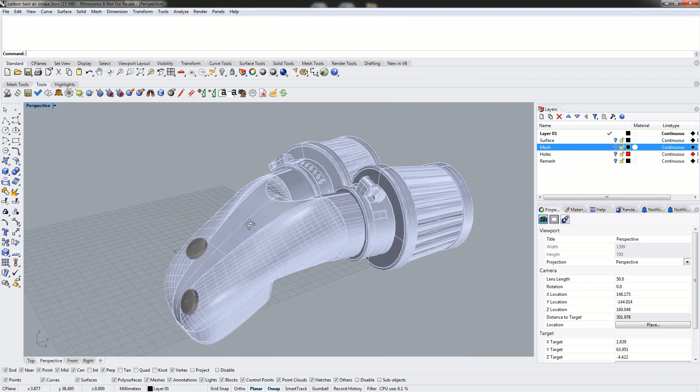Today we will be looking at a composite part. This is a twin turbo intake manifold, and as we can see, this was modeled as more than just a manifold. We also have some set screws here, ratchet straps, and air filters on here.

This particular part was not modeled inside of Rhino. It was imported as a step file and resaved as a Rhino 3DM. So because it wasn't modeled inside Rhino, we're going to have some cleanup that needs to be done before we can actually proceed with flattening.

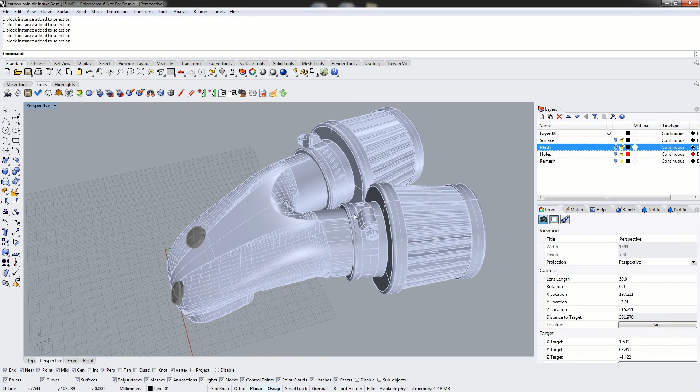So the first step is to remove the unneeded geometry. Because we're only flattening the manifold, this part here, we need to remove everything else. We can either select everything else, or we can select the manifold and invert the selection. In this case, we've selected the filters, the ratchet straps, and the set screws, and we can simply hide these or delete them.

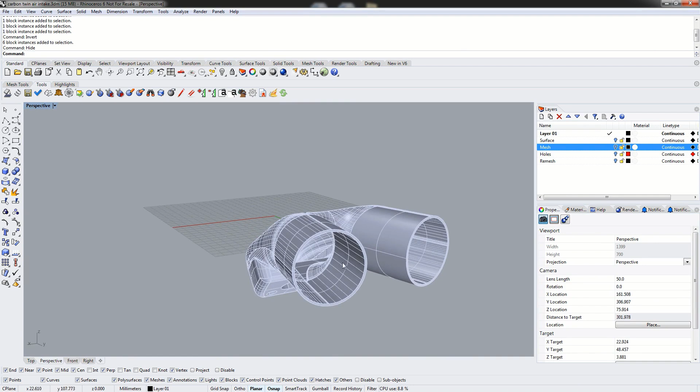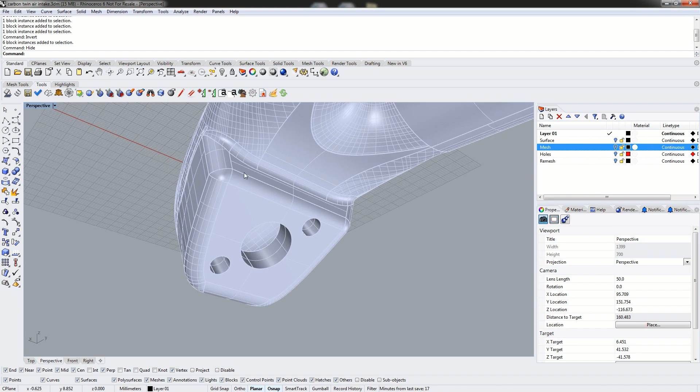When we look at the manifold itself, we can see that it has thickness to it. Where the filter is attached, we can see the thickness, and down here at the mounting plate, we can see we've got quite a thick plate. So we're also going to need to remove the thickness, and we're going to remove a good portion of the mounting plate for flattening purposes, just because we're not going to be doing this from the carbon fiber.

So our next step is to basically explode our surface here. This came in as a block, so we have to explode this to remove the block reference and to separate the poly surface out into individual surfaces. Once we're done all that, we end up with a single surface very much like this.

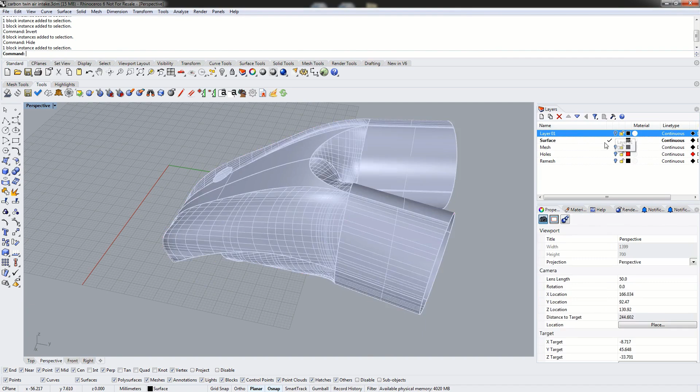So I've already done the work of separating this out. What we have here is a single surface. We've removed the filters, the ratchet straps, and the set screws here, and we've also removed a good portion of the mounting plate.

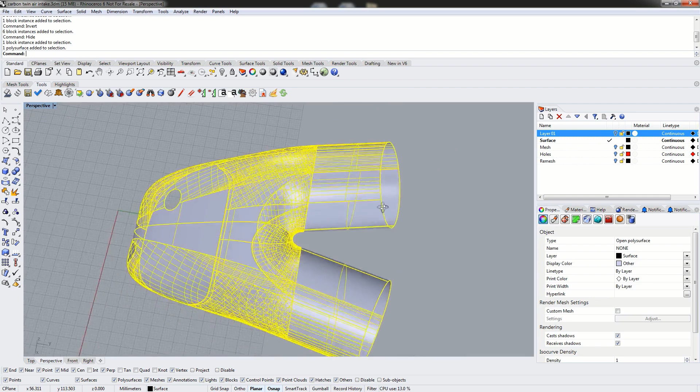With ExactFlat, the standard workflow is to first get your surfaces that you want to flatten. You need to create splits in the surface where you want your seams to be, and then join it all together into a single poly surface. When we mesh a poly surface, we get a much better result. We have continuous mesh vertices and shared edges across surface boundaries, which is ideal for ExactFlat.

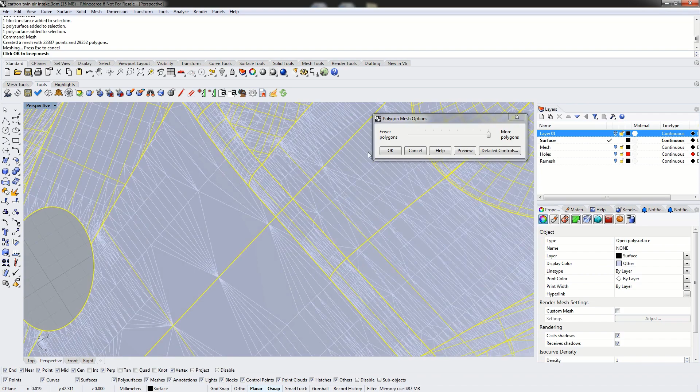So we join everything together as a single surface, and then we use the Rhino mesh command to create a mesh. We can use simple controls and drag the slider over to more polygons, and when we click preview, we get a decent mesh. But when we look at the mesh, we can see we have a lot of high aspect ratio triangles, and when we look at the quads, we have very strong rectangular quads that are far from being square.

Even though ExactFlat will work with this, when we use the Adaptive Remesher to recondition this mesh, because we have very large triangles right next to very small elements, we end up with an uneven sampling across the surface of the mesh, so we can get unpredictable results. In most cases the Adaptive Remesher won't have a problem, but on occasion we can get meshes that just don't adaptively remesh nicely, or have errors in them.

So the easiest way to prevent this is to instead use detailed controls. The most important thing is to change the maximum aspect ratio to about 2. What the maximum aspect ratio does is control the aspect ratio of the triangle. So when you consider the shortest edge of the triangle against the longest edge, the aspect ratio is how much longer the longest edge is.

So when we set this to 2, we're basically saying that the longest edge can be at most twice the length of the shortest edge. This is going to help control our triangle shape and size, as well as quads.

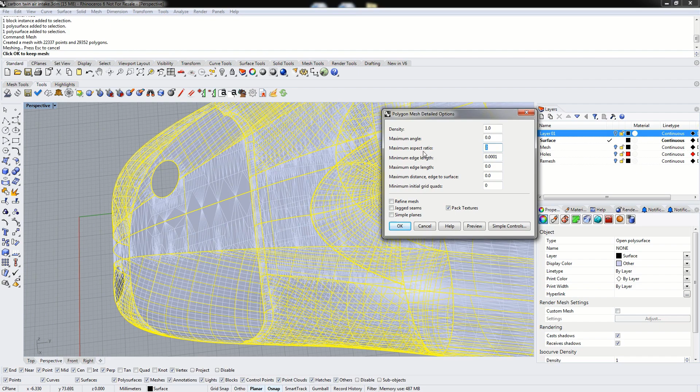The other thing we're going to change is the maximum and minimum edge length, and these are best set based on the size of the mesh. If we rotate our view so the construction plane is perfectly normal to our camera, we can use the coordinates and move our mouse around to get a sense of scale. When our mouse is over here, we're around -50 on the x-axis, and over here around 50, so this part is about 100 millimeters wide. Moving up here we're at about 120 on the y-axis, and down here about 10, so we're about 110 tall.

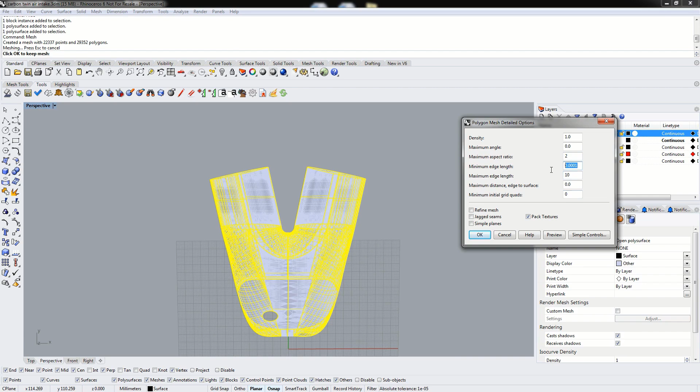Given that, we want to make sure we have a fairly good sample spacing. Based off these measurements, it's best to always start high, so we'll start with a maximum edge length of around 10 and set our minimum edge length to 1. If we hit preview now, we get a new mesh with a much more uniform distribution. However, our elements are still fairly large, so I prefer a bit smaller element spacing.

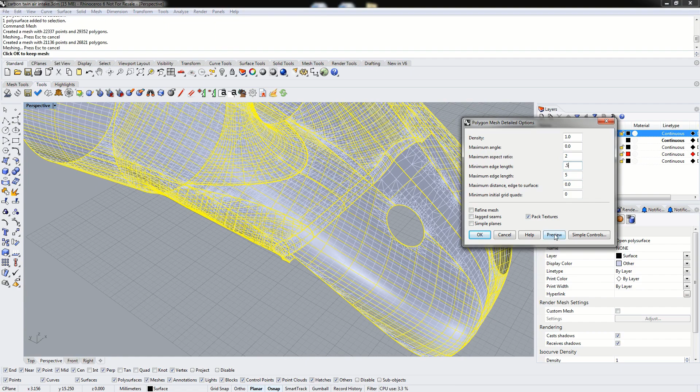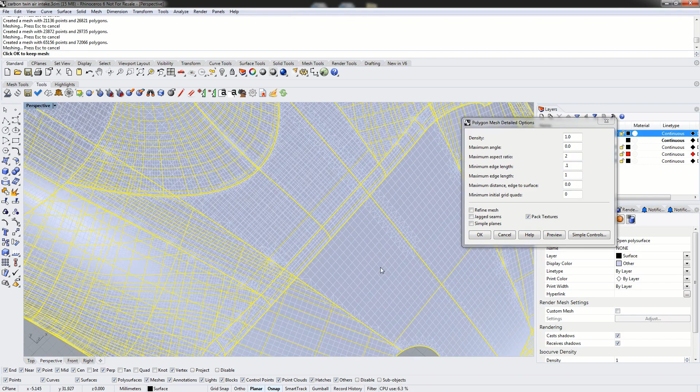So we're going to cut this in half: 5 for maximum edge length and 0.5 for minimum edge length. Now when we hit preview, we've got smaller elements, but they're still a little too large—we didn't decrease the size that much, so we're going to reduce further. We'll do 1 and 0.1, and now when we hit preview, we have a much finer element distribution. Our quads are now more or less square, and they tend to match the size of the triangles. This is a really good mesh to start with for the Adaptive Remesher.

So we're going to go ahead and accept this.

Because this part was created from an import file, it was imported as a STEP file from a CAD package outside of Rhino, so we do have a few meshing errors.

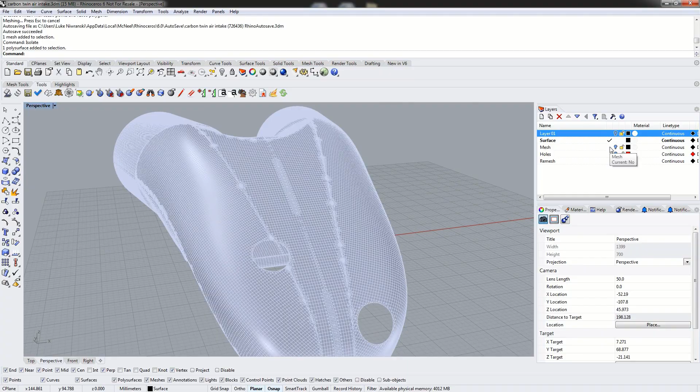Instead of showing the process of repairing these in the video, because it can take quite a while to identify and fix them all, I've already gone ahead and created a mesh and repaired all the errors, so we're going to be working with this mesh.

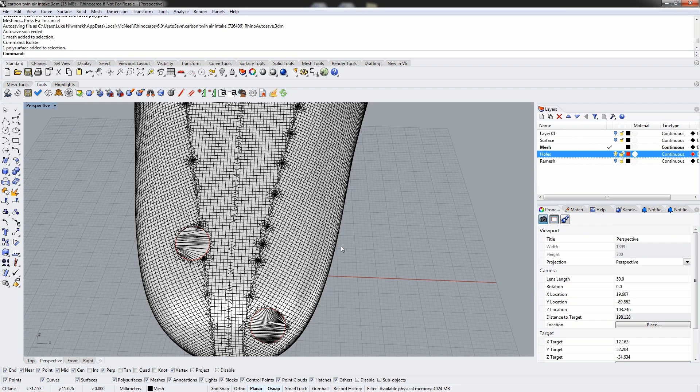I have also filled in the holes here where the set screws were, and I've preserved their boundaries as curves. With ExactFlat, even though we can flatten pieces with holes in them, it's usually better to fill those holes in and preserve the boundaries of the curve, so we can trace those holes back onto the flat pattern afterwards. By filling in the holes, we simplify the geometry that's going to be flattened, making it easier for ExactFlat to flatten this. We decrease the amount of time required to optimize, and we also allow the optimizer to give us a better pattern that will sew together at all the seams.

From here, we're going to go ahead and select our meshes. Instead of remeshing these outright, if we have an issue with the Adaptive Remesher, it's always good to have a copy of these, so that we can go back to them and make any repairs and remesh again.

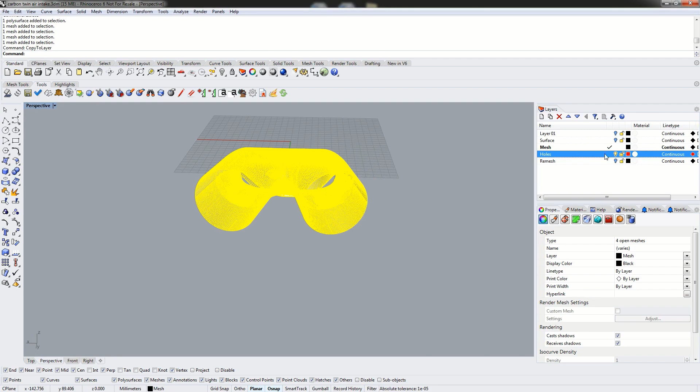So we're going to select our meshes and use the Copy to Layer command, copying these to the remesh layer to create a copy, and we're going to remesh the copy. Now we're going to rectangle select everything and switch over to the Mesh Tools toolbar, the ExactFlat toolbar, and use the Adaptive Remesher.

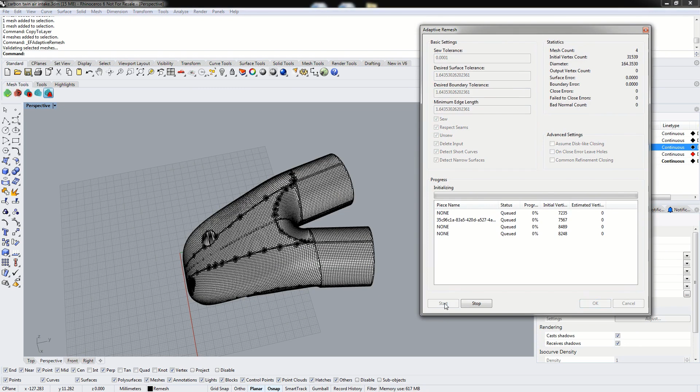So the first thing we're going to do before we start changing settings here is click the Start button. This is going to create a remeshed version of the mesh, and it's going to tell us how many vertices we have. It also gives us a way to visualize the part, and gives us a basis for determining whether we need to reduce or increase the tolerances.

If we have too many triangles here still, we're going to want to increase the tolerances, increasing the maximum allowed distance between the original and new surface and boundary. Or if we need additional triangles to preserve features that have been removed, then we're going to want to lower our tolerances.

To reduce the allowed distance between the new and the old mesh, in this case we're down to about 480 vertices on our largest mesh. So we do have some room to improve the fidelity and add more triangles while still creating a mesh that's going to flatten very well with ExactFlat.

So we're going to go ahead and reduce these here, cutting them roughly in half. I'm going to say 0.7 for these here, 0.7 and 0.7, and it's best to always keep your minimum edge length the same as the smallest value between the surface and boundary tolerance.

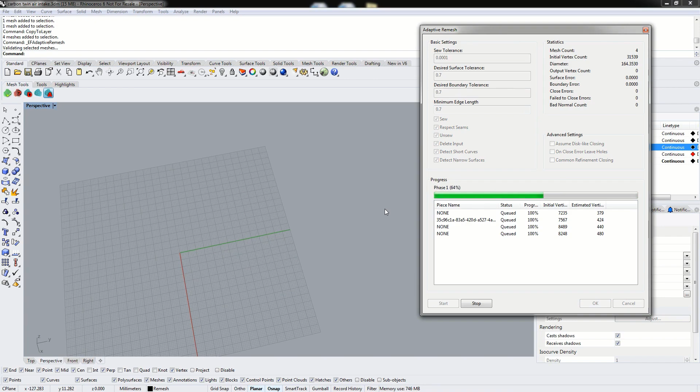So we'll just go ahead and click Start again. We're going to restart the remesher and create new meshes here. So it's analyzing the mesh again, and now it's giving us our estimates and creating the mesh.

So we can see that we've got more triangles here. It's preserving the curvature a lot better, especially down here where the two intakes meet up. So this is a good result. We're going to go ahead and click OK.

And if we rotate around, we can examine the quality of the mesh here. One thing we'll notice is that we've got a lot of areas where we tend to have zoning of the triangles—they tend to get very small. These can be fixed, or you can leave them as is.

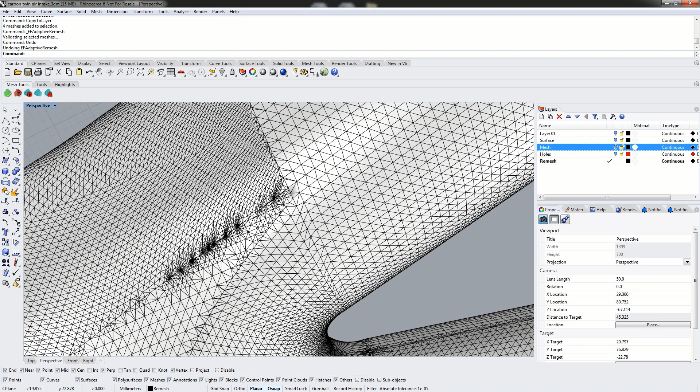We haven't created a huge number of triangles here, but if we undo the remesher, we can see that these areas all correspond to locations where the Rhino mesher has created a very large number of triangles. So this is the predominant source of errors, and this is what I spent most of my time fixing on this mesh before flattening it.

So the easiest way to fix these errors—this particular area here—if we redo our results, we can see that we've got one spot here in particular that's being highlighted. So we've got some kind of meshing anomaly here, and we can see that corresponds directly with this spot right here. Probably we have a very, very thin, small triangle right here that could be removed.

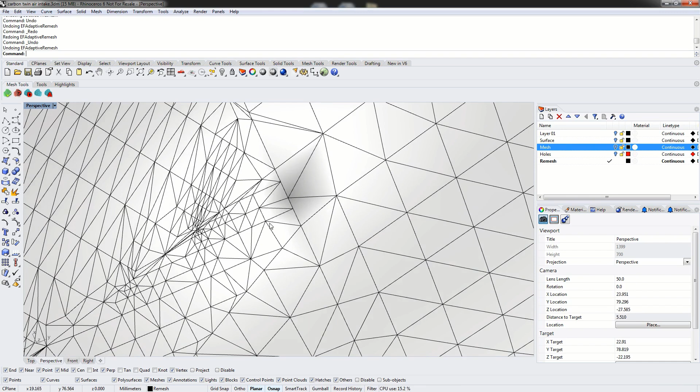So what we'll do is a quick repair on this mesh right here. The easiest way to deal with these kinds of problems is to simply remove the triangles. So in the case of this mesh, I'm just going to align it so I can remove or simplify this entire strip right here.

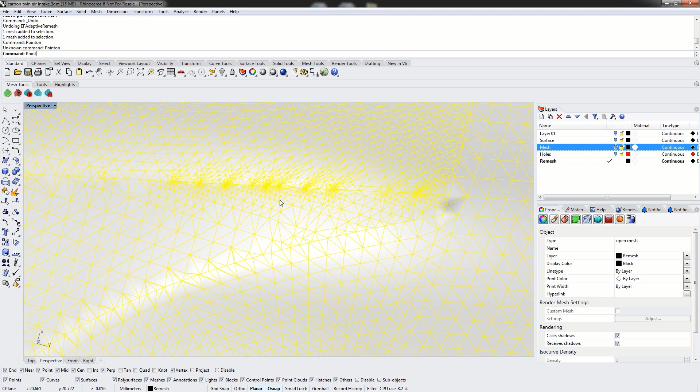So I'm going to try to make this perfectly horizontal as best as possible. Now what I'm going to do is use the Points On command. Points on. And this is going to allow us to start selecting vertices and manipulating vertices.

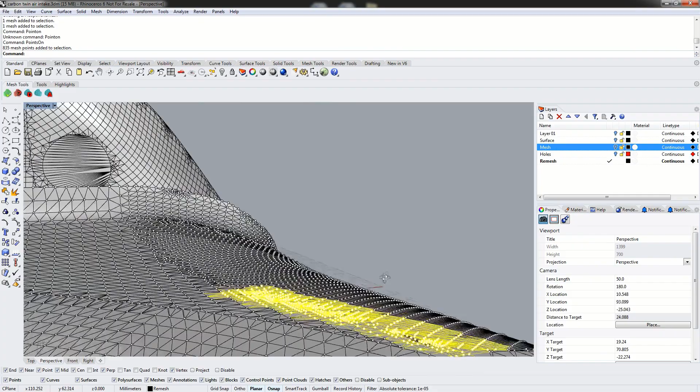But instead of manipulating them, I'm just going to select all these vertices right here, because we know we've got some kind of problem in there. And if we actually rotate around, this is a fairly planar surface here—we don't have a lot of curvature.

So the easiest way to deal with this is to simply delete the bad vertices. Now what I'm going to do is use the Rhino Fill Mesh Hole command, and fill this in. So it's going to greatly simplify. We've probably removed a couple hundred vertices there and replaced them with maybe 20 triangles. So this is a very great way to fix these kinds of errors.

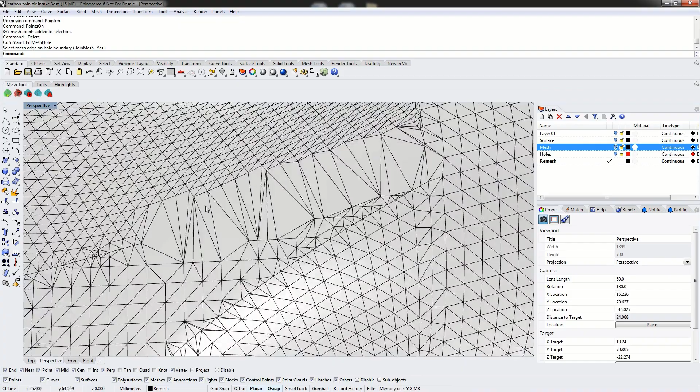Now what I'm going to do is, because we've filled the hole, we actually created a disjoint mesh here—it's created a separate mesh and joined it together. So we've got duplicate vertices all the way along the edges here. We're just going to use the Rhino Weld command to fix this. And now if we go to remesh these, I'll use the SelMesh command to select everything, and we'll adaptively remesh.

We'll go back to our original settings, 0.7, 0.7, 0.7. Now if we create our mesh here, we'll notice that our estimated vertex count is reduced for this piece, and we'll see that we no longer have that localized zoning there. So that's the easiest way to fix the mesh errors.

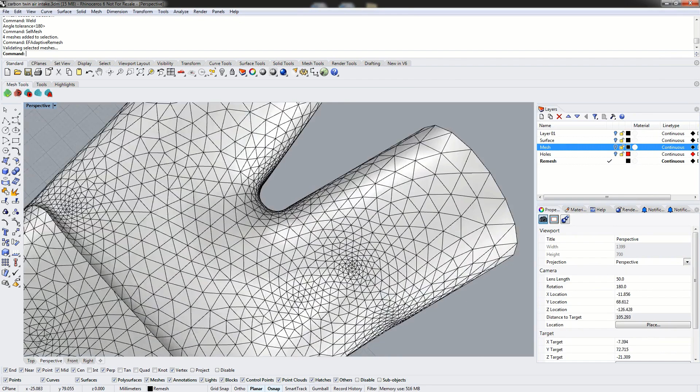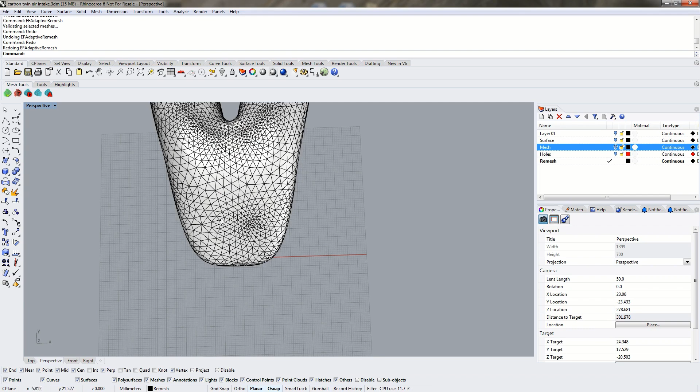We could do the same thing over here, and if we undo again, we'll see that that particular spot corresponds to these triangles here. So the easiest way to fix these errors - and in this case these aren't too bad. Some of the errors I did fix had very small or fine zoning, so we had to remove them. But in this case, if we undo again, we can see that area once again corresponds to an area of lots of triangles here.

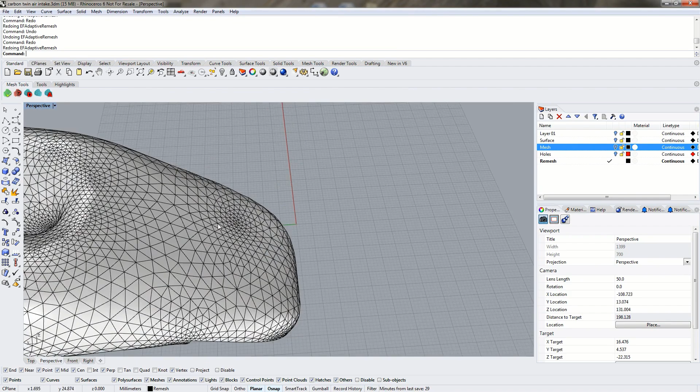So the result we got from the adaptive remesher redo isn't terrible. We have a bit of zoning here, but not excessive zoning, and we still have a reasonable number of vertices and triangles on this mesh. So it's not worth spending time to fully remove all these errors. But if you did need to, the easiest way is to simply delete the vertices associated with those triangles and just fill the hole in.

So once we've adaptively remeshed, the next step is to flatten using ExactFlat. We're going to switch over to the Tools tab of the ExactFlat toolbar, and use the very first icon here - this is the Flatten command.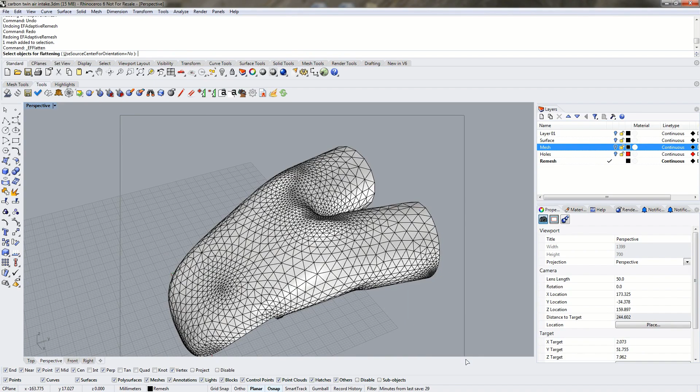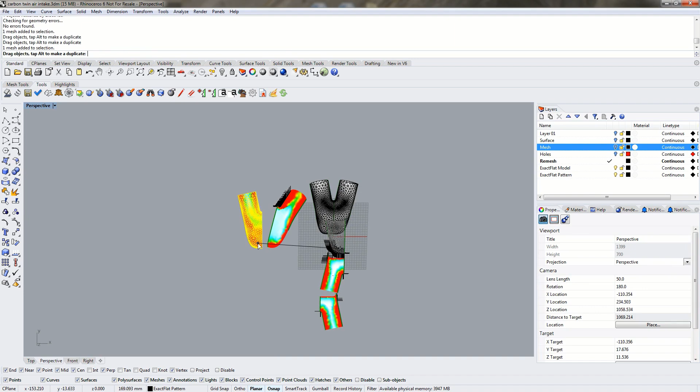ExactFlat is a two-stage flattener. The first stage is a very quick pre-flattening. ExactFlat has two different sets of flattening tools - the first are what we call pre-flatteners, and we're seeing the results of a pre-flattener right now. The pre-flatteners very quickly create an unoptimized flat pattern that may have folds, wrinkles, or flipped triangles in it. The whole purpose of the pre-flatteners is to be very fast.

Once we're done with our pre-flatteners, we'll move on to our optimizer - this is the second flattener we have, and it's a much slower flattener, but it's the one that's always going to give you the final optimized shape and reduce your average energy density to as close to zero as possible. One condition of using the optimizer, though, is that we cannot have any flipped triangles.

So when we look at our pattern pieces here, we can see a lot of black crosses, and these indicate flipped triangles, folds, or wrinkles in the pattern. These need to be removed before we can use the second stage flattener, the optimizer.

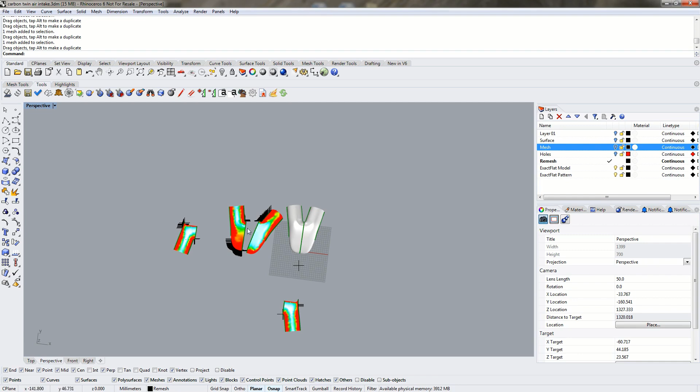Also, the performance of the optimizer depends entirely upon how much strain it has to remove. So when we look at the color of these pieces here, the color represents the relative amount of strain on the pattern piece. The default legend for ExactFlat has white indicating 0 strain, cyan about 5% strain, green 10%, yellow 15%, and red 20% or more.

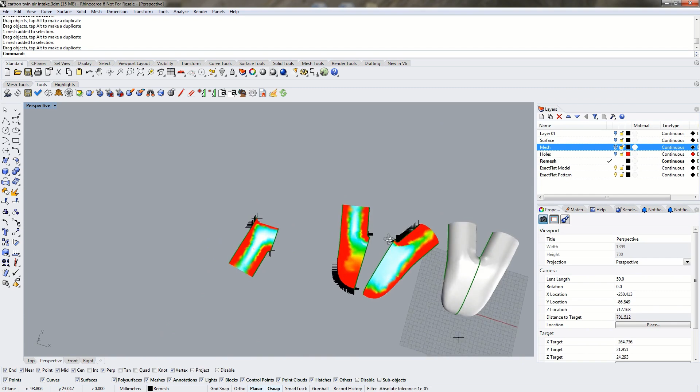So we have quite a bit of strain on these pattern pieces. The best way to think of strain is if we think of our original 3D model as a rigid form, a plastic shell - if we were to stretch these pattern pieces back onto the shell, the more strain we have, the more we're going to have to pull and stretch them to get them to fit back on. So when we have a lot of strain, it just means our pattern is too small - it's not going to fit onto the piece.

So when we think of this in terms of our pre-flatteners, the two biggest goals for our pre-flatteners are, first and foremost, to remove flipped triangles - all these black crosses here - and second, to reduce the strain on the pattern pieces.

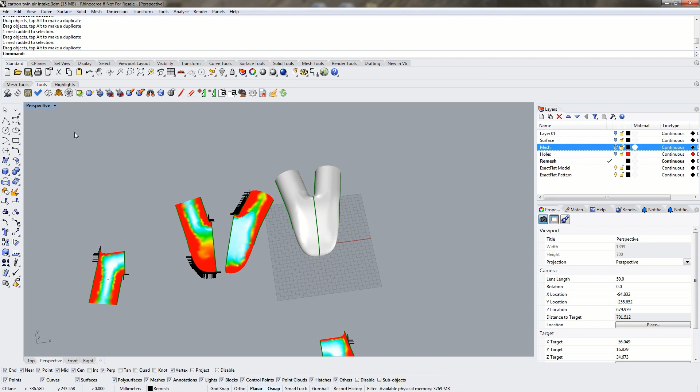So if I were to use our pelt tool here on this piece, first of all, we're going to notice that we no longer have the crosses or the flip triangles. Second, we've reduced some of the strain, although we still do have quite a bit of strain on this piece. So we could try a different pre-flattener here.

So we'll try our CCM initial and see if we get a better pattern here. And in this case, we actually start to see a bit of black here. Black indicates sag, which is the complete opposite of strain. This means we have excess, or more material than we need.

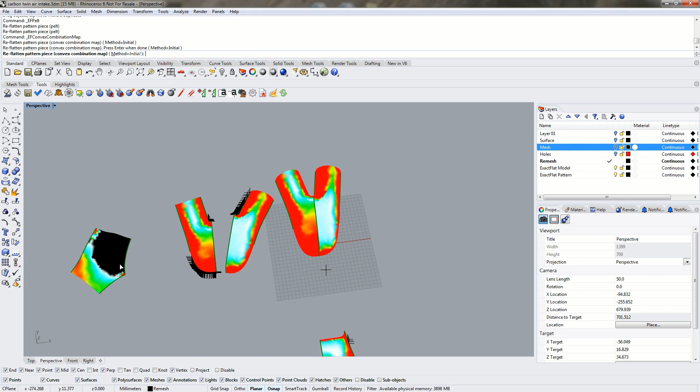So in this case, none of our pre-flatteners, fracture is not going to give us much of a better result. We do have a lot less strain with fracture, however, we do have flip triangles.

So one thing we can try is to remove the flip triangles with our CCM minimal pre-flattener, or we can use our automated flip triangle removal. But for this part, pelt tends to give the best results.

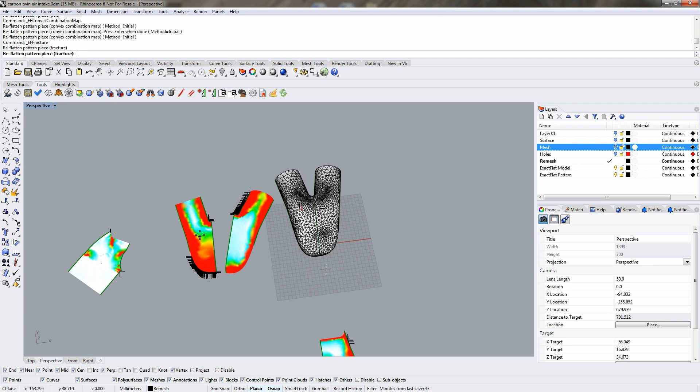So we'll try fracture on a few more pieces. And the other thing with fracture, too, is we can use our pre-flatteners as many times as we want, on as many pieces as we want, so long as we optimize our pattern pieces after we pre-flatten them.

So the typical ExactFlat workflow is, once you've flattened, you can use any of the tools at any point in time that you want, whether it's a pre-flattener or some of our cutting tools or vertex manipulator.

So long as optimize, our second stage flattener, is always the very last thing you do. Because the optimizer is going to optimize your pattern piece for best fit, it should always be last.

So we're going to go ahead and pelt these pieces here because we know pelt gives a good pattern, and we'll do the same to this one over here and this one here. So for all these pieces, we've removed all of the flip triangles, or folds and wrinkles.

We don't see those hatches anymore, and we've produced a pattern piece that doesn't have huge amounts of strain, although we could produce patterns that have less strain.

In this case, because we've got a lower vertex count, we're all under 1,000 vertices. Even if we do have elevated strain values, ExactFlat's still going to be able to handle this just fine.

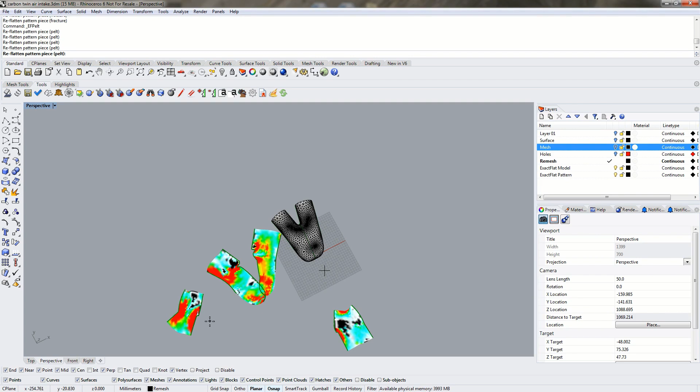So sometimes it could be difficult to spot flip triangles, especially if we have a lot of sag on the pattern pieces. So one easy way to do this is to switch over to the Highlights tab of the ExactFlat toolbar, and we're going to turn off our strain analysis.

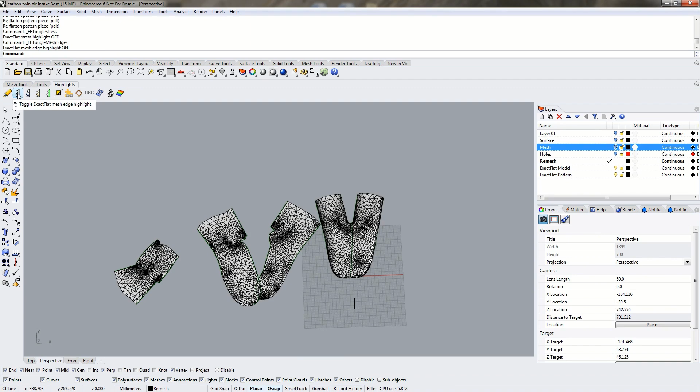Oftentimes, too, you'll have the edge highlight turned on, so this is what it looks like with the edge highlight turned on—you can actually see the edges. If this is the case, you can turn the edge highlight off as well.

This makes it very easy to spot folds, wrinkles, or flip triangles on the pattern piece. In this case, we don't have any folds or wrinkles, so we don't have to do any additional work.

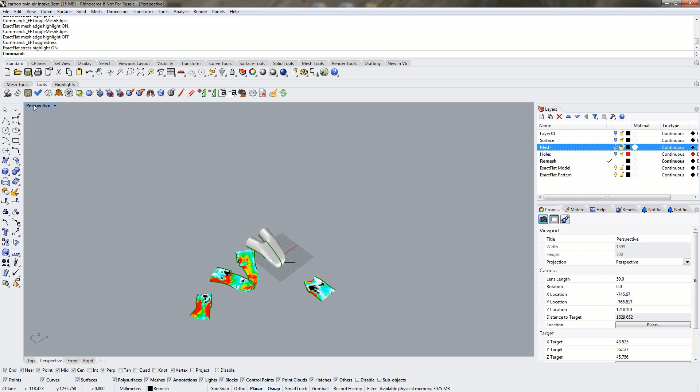So we'll turn the strain highlight back on, and we're going to go back to our Tools tab. At this point, because we're dealing mostly with our pattern, what I'm going to do is minimize our perspective viewport by double clicking on the viewport title.

And now we're going to go over to our top viewport, so we're looking straight down at our pattern piece. I'm going to maximize this by double clicking on the top viewport title.

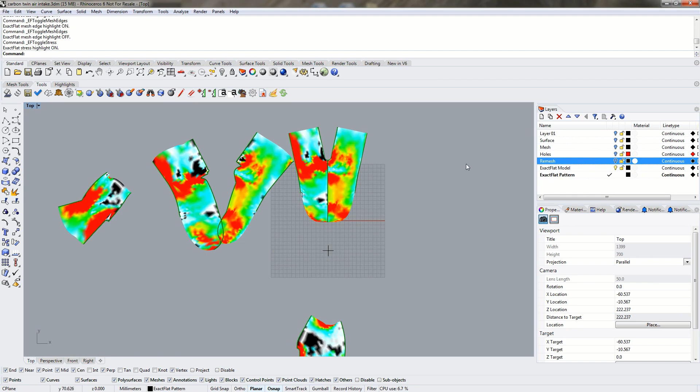I'm also going to go over to our layers tab, and I'm going to make the pattern layer our default layer, and I'm going to hide the remesher model and the 3D reference model as well. So now we're only looking at our pattern pieces here.

So we've accomplished our two goals using our preflatteners. We've reduced the strain a little bit, and most importantly, we've removed all the flip triangles. So now we're going to use the optimizer to minimize the average energy density.

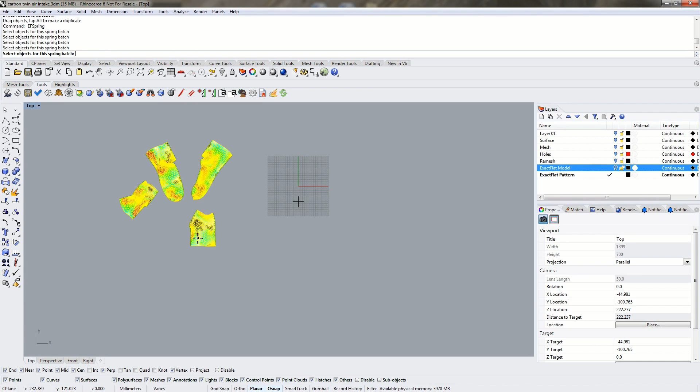We'll start the tool, select all our meshes, and press enter to accept the selection. For this part, I don't have any carbon fiber, fiberglass, or composite materials in our default database, so we're just going to use a simple cotton. But when you use ExactFlat, if you've had your material analyzed or want to choose a different material, you can click the Browse button to open the material browser and choose from one of ExactFlat's default 85 materials or one you've created yourself in the library. When you're done, just click OK.

We can start the optimizer by clicking OK here, and this opens up the spring status. As this is running, we'll notice both the colors and the shape of the pattern piece changing. What's happening is ExactFlat is expanding the piece, either adding or removing material, and changing the shape to optimize the fit onto the original piece. So if we think of our 3D model as a rigid plastic shell, it's changing the shape so that when we lay this pattern piece back on the rigid shell, it fits such that we have to pull or stretch it as little as possible.

We can see the colors changing because the shape is changing, which means the amount of strain on the pattern piece is also changing. We can see this in the optimization report. Piece 1 is finished optimizing already, and we're on to piece 2. I'm going to go back to piece 1 here, and we can see different information being reported for our pattern piece. Probably the most important piece of information is our average energy density.

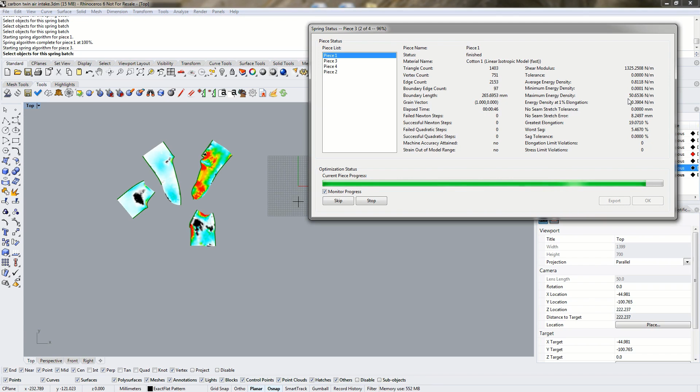Although this is important information, it's not as important because we can artificially increase the maximum energy density just by manipulating an interior vertex. Really, it's the perimeter that we're worried about when we optimize our piece. So the maximum energy density at 50 isn't a huge problem.

If, for instance, we had a maximum energy density that was, say, 20,000, that's a good indicator that we've got some kind of meshing error, and that's a problem that will have to be fixed. That may be the result of overlapping triangles or an impossible surface to produce, for instance some kind of loop built into our mesh. That's when we're going to start to see very high energy and maximum energy densities like that.

The other couple pieces of information that are important would be our no seam stretch error. The dialog does report the boundary length of the 3D model piece, and the no seam stretch error is basically the difference between the 2D pattern perimeter length and the 3D model perimeter length.

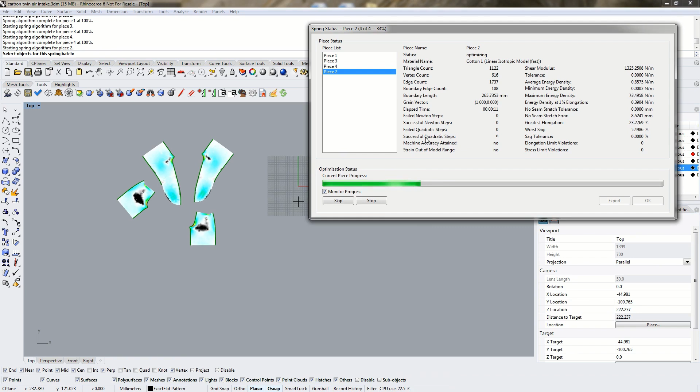Right now, after we've optimized this pattern piece, our pattern perimeter has changed by about 8 millimeters, which over the size of the piece is not a huge error. Depending on the material being used, especially like cotton, materials are stretchy, so that error can be taken up just by the stretch or expansion of the material. If you're working with materials that don't have any stretch, like a composite weave, which typically doesn't stretch at all in the warp or weft direction but can deform on the bias direction, it's best to have your no seam stretch error as close to 0 as possible.

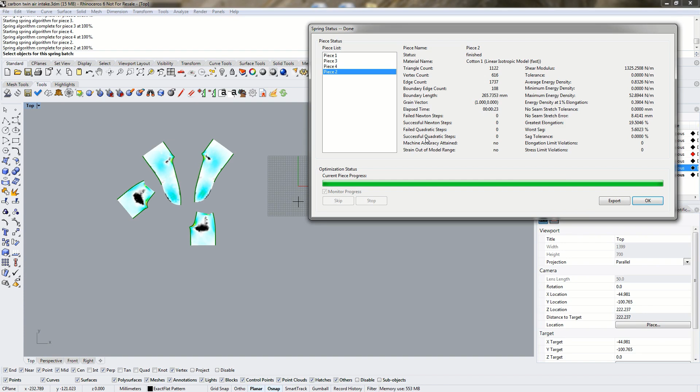And if you're not getting decent results just with the default settings, when we go back to the pre-spring settings, I'll start the optimizer again here on one piece. We can turn on a preserve boundaries option, which allows you to constrain the no seam stretch error to within an acceptable tolerance. So we can say that we want at most 5 millimeters of error between our model and pattern perimeter length, and the optimizer is going to constrain the perimeter length to at most 5 millimeters.

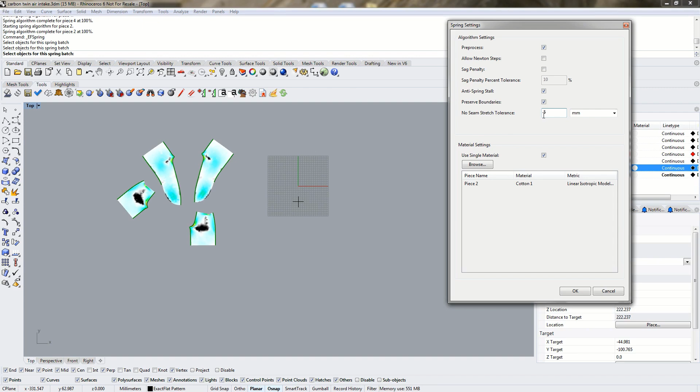So optimization has completed for all of our pieces, and we can see that the color and shape of them have all changed. We've greatly reduced the average energy density for these pattern pieces simply by optimizing them.

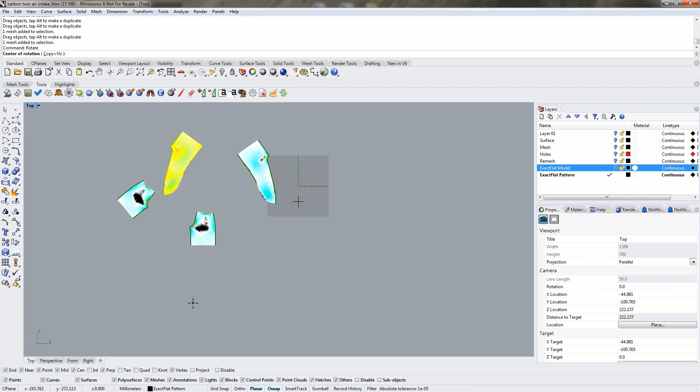At this point, we can rearrange our pattern pieces to help us with the patterning. One easy way to do this is we can simply rotate the pattern pieces using Rhino. In this case, I'll use the rotate command, and I'm just going to choose one of the vertices here as a selection point to rotate the pattern piece.

I can also use the ExactFlat find tool, which helps me find neighboring pattern pieces. With this tool, I'm going to rotate this again right here. I'll select these two points and make this perfectly horizontal. I can snap my selection points to be perfectly horizontal or vertical by holding the shift key on the keyboard.

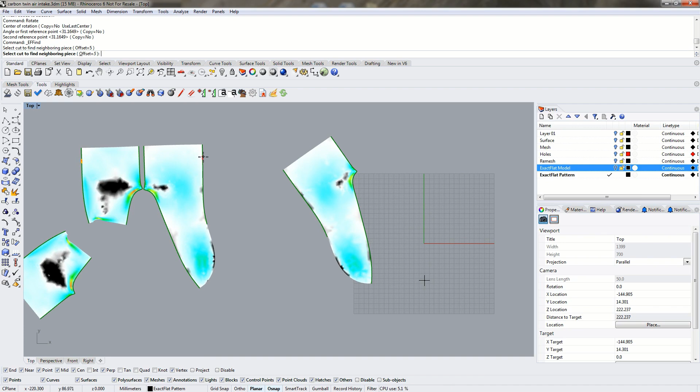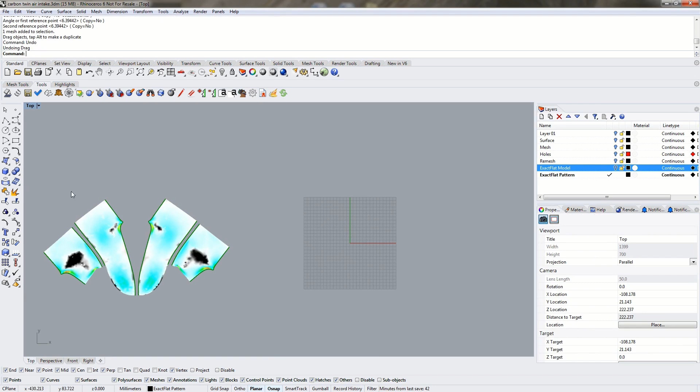Now I'm going to use the ExactFlat find tool to find the neighboring pattern piece. As I mouse over here, it's going to automatically find the neighboring piece for me. So I'll just rotate these here. This is how these pieces would come together, just like this.

At this point, depending on your patterning workflow, you may be using Optitex software, Gerber, or AccuMark for your patterning work, in which case you can simply create a DXF and start your patterning process in another package. However, ExactFlat does provide basic patterning tools.

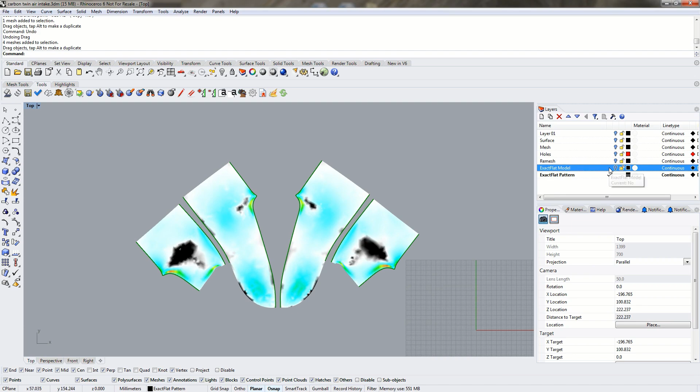Before I forget, we did remove the holes. We did have holes for the set screws. If we go back to our model layer here, we no longer have holes in our 3D model. I'll go back to our perspective view, but we did save the location of these holes, and they're on the holes layer. We can see we've got these two holes here, and they are curves that do lie on the surface of the mesh here.

So what we're going to do is trace these holes onto the pattern pieces, and to do this, we're going to use the ExactFlat trace command. We're going to start the command by clicking on the icon, and we're just going to start by selecting the first curve. It's important to note that the command line always tells you what is expected, so it's best to read it when using ExactFlat commands. It will tell you what needs to be selected to perform the action. So we've selected our object that we're going to trace.

In this case, it's a curve. We're going to trace it onto this model piece, and at this point we're given the option of defining our curve fit tolerance. When I created this curve, I simply duplicated the mesh border, so we created a polyline, so the curve fit tolerance has no role here. However, if we were tracing a spline or curve onto the mesh, then the curve fit tolerance defines how many points we want when we tessellate that curve into a polyline.

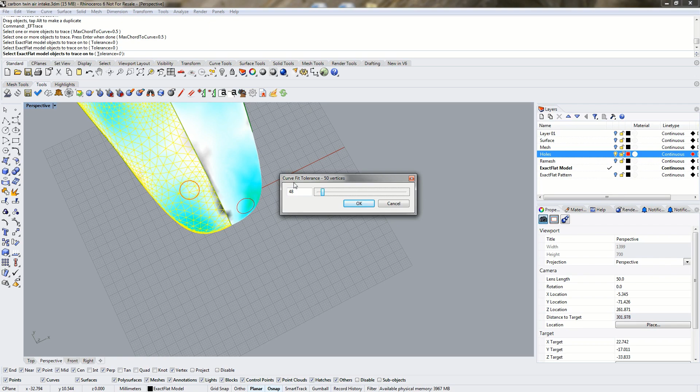So we'll go ahead and click OK, and very quickly we've traced this curve onto the 2D pattern. If we make our pattern visible, we can see this is the perfect location traced from 3D to 2D of that hole.

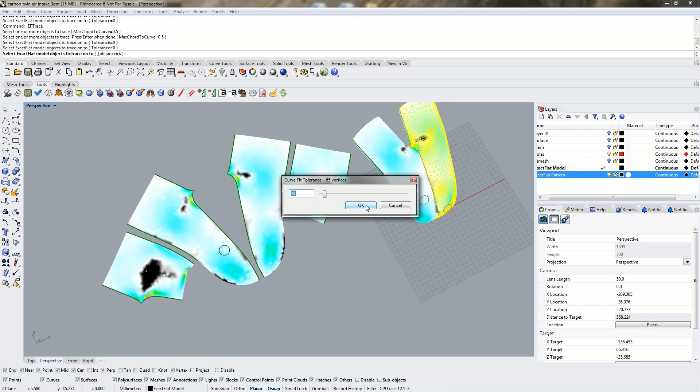So we'll repeat the process again using this curve over here. We're going to trace that curve onto this pattern piece, and we're just going to accept the curve fit tolerance, and very quickly we trace that hole onto the pattern piece.

We can use the ExactFlat patterning tools to add things like notches, and in this case we've used our patterning tools to trace the location of our holes back onto the pattern. This tool can be used to indicate the location of different hardware items, in this case the set screws, and the location of the hole that needs to be cut out. We can use it to indicate the location of labels or mark where things need to be sewn. We can use it for annotation purposes if you need to indicate a seam line of some sort, or the start or stop of a zipper, for instance. You can use the tool to create a marking on the pattern to indicate those locations.

We can also use our notching tools to add notch or alignment markings to the pattern piece. We just start the tool by clicking this icon here, and the default settings can be changed. This is the default template used for all of our notches that we're going to be adding. For this one here, we're going to set the notch text that's going to be created as simply a unique auto-incrementing number, and we're going to create red slit notches.

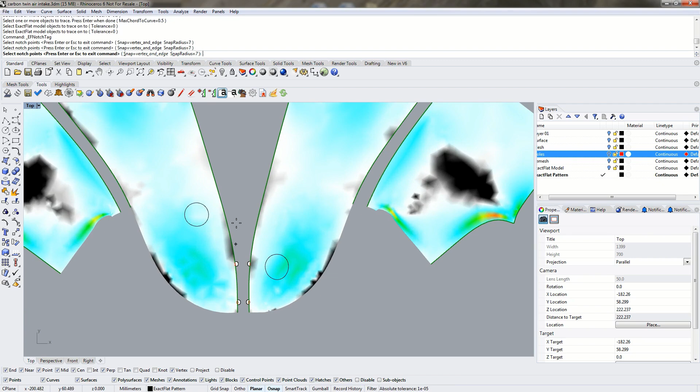We're going to go ahead and click add, and as we start adding our notches here, we're going to notice the notches appearing on both the left and right hand side of the cut. This is because ExactFlat builds associations as it's flattening, so it knows which two pieces sew together. So as we add notches to one side, ExactFlat is going to automatically add that notch to the other side. When we're done adding all our notches, we just press enter on the keyboard, and we can see all the notches that we've created in the list here.

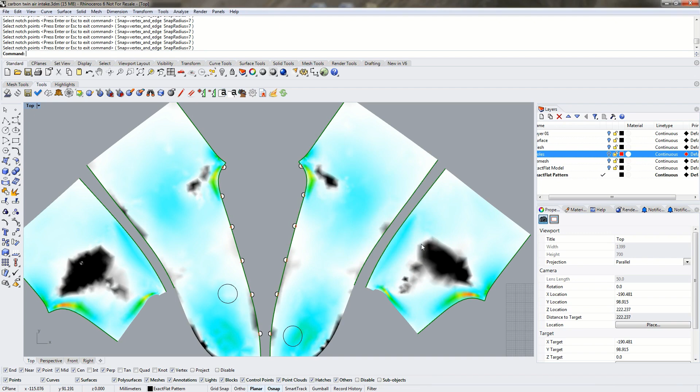Once you're done adding your notches and adding all your markup to the pattern, we can create a DXF by using the ExactFlat DXF export tool. This tool is different from simply saving your part as a DXF. When you export a part with ExactFlat using the DXF export tool, all the hardware markings that you've traced on, all the notches that you've created, any kind of tags that have been created - all this information is transferred to the DXF, whereas if you just simply save your file as a DXF, you simply get the perimeter of the mesh. You don't really get all that information that you've added.

So it's important to use the ExactFlat DXF export tool, otherwise you're not going to get all your information in the file. We also get a seam allowance applied to our pattern piece when we export with the ExactFlat DXF exporter, and again that's information that's simply not created when you save your part as a DXF.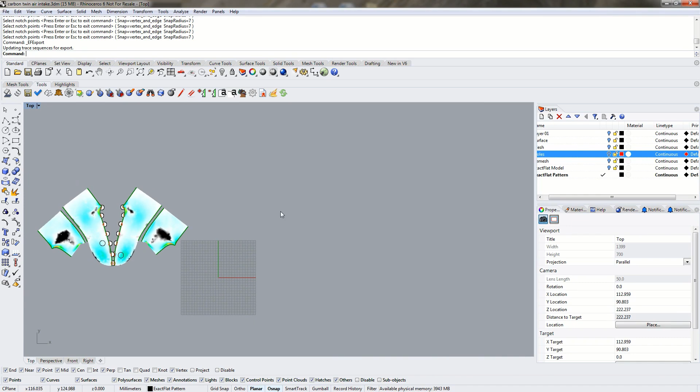So I've already saved one DXF here. I'm just going to select that file and save over top of it, and now what we're going to do is import this file and compare the DXF we just created with the pattern piece here. I'm just going to use the Rhino import command, select our carbon twin air intake, and import this into the document. So here's our part that we created up here. We've imported it into the document, and now we can see the work that we've done.

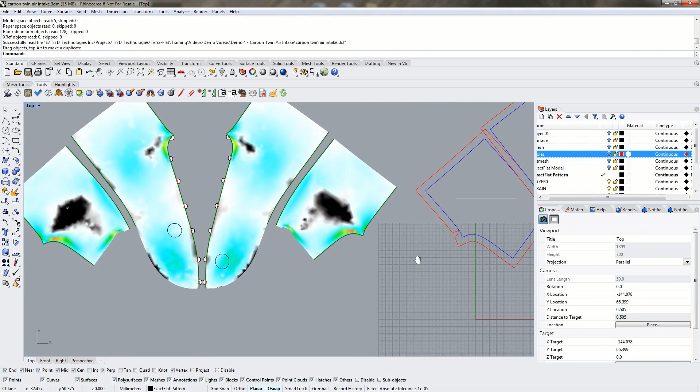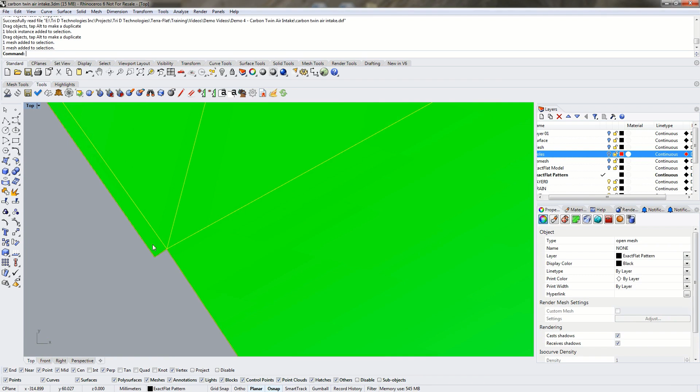Right away we can see that we've got a couple patterning errors over here. If we line this up here, we can zoom in, and in this case this patterning error is probably created from right there. So we probably, when I was splitting up my mesh, missed a tiny little selection here. So because of the way this offset was created, it's created some undesirable result in the pattern piece here.

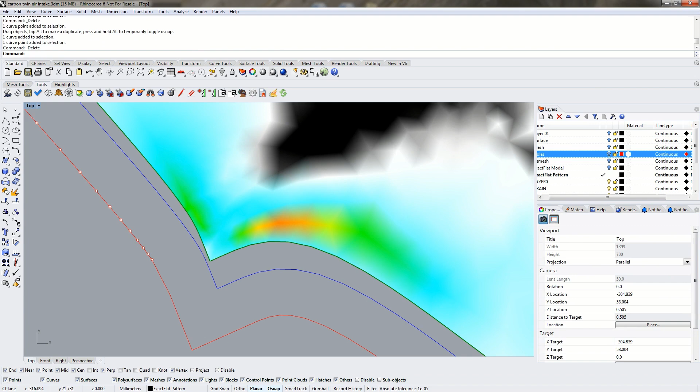So we can either fix this in the pattern by eliminating that little piece, or we can select our pattern piece here and block edit this piece, and simply manipulate and modify the vertices to remove this patterning error. In this case, I'm just going to delete the excess vertices here and drag this over here. So it's very easy to fix these kinds of errors.

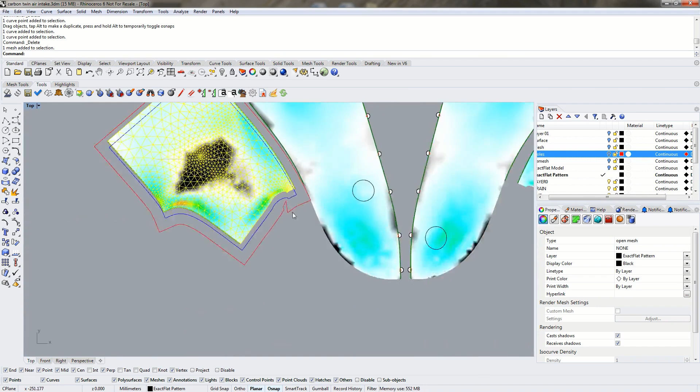And we'd have to do the same thing over here. Again, this kind of seam error was probably created because of the way this piece wraps around. If we zoom in, we probably are going to notice other small problems here that were just missed during the flattening process. But the information we're looking at here is for each piece, we're going to have a blue line and a red line. The blue line represents our seam, which is the natural boundary of the pattern piece.

Our blue line is going to line up perfectly with the perimeter of our pattern piece. We also have a red line, and that represents the seam line plus an optional seam allowance that has been added to the pattern piece.

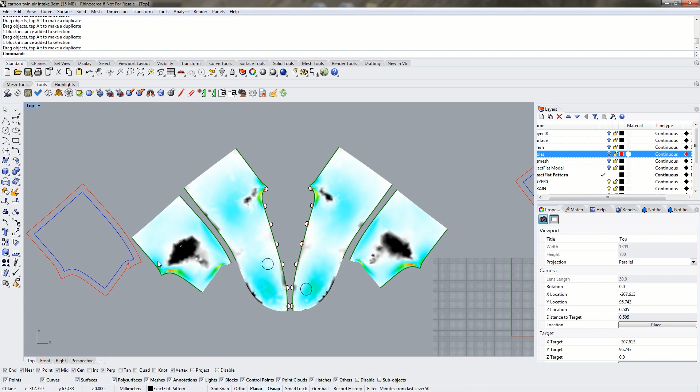We've also got a gray line here representing our grain line. With ExactFlat, unless we manually add a grain line using our grain line tool, our grain line is always going to be the horizontal x-axis. So you can always align your pieces along the x-axis and assume that the x-axis is going to be the grain line.

For our other pieces over here, we can see we've got our notches that we've created. In this case, we've got our slit notches, and down here we can see they perfectly line up where the two pieces converge. The reason the slits span the entire seam is because of our notching template.

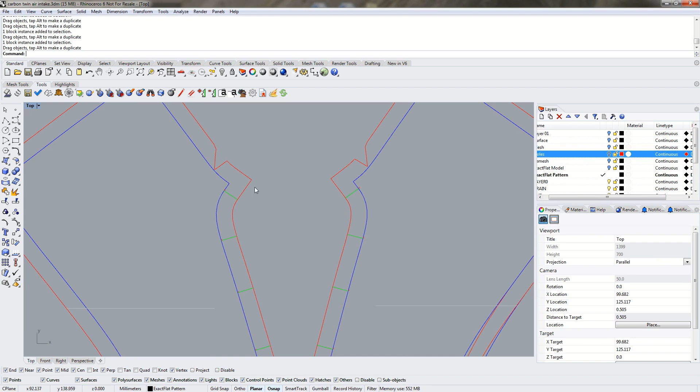When we look at our notching template again here, we can actually specify the notch length, and in the case of V notches, we can specify the width as well. But if you have a notch length of 0, it's just going to assume the length of the actual seam allowance that's been added. If you manually set the notch length, that will control the length of the notch starting from the cut line. So you don't always have to cut your notch right from the cut line all the way to the seam line. You can manually specify the notch length as well.

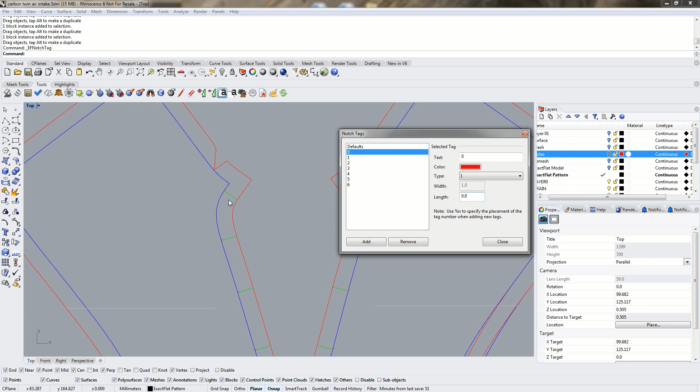When we zoom in a little closer, we can see that we do have our notch tags here visible as well. So we have quite a bit of information on our DXF, and the most important thing is that all of this information is placed onto different layers.

So when you import this into your nesting software, if you're using something like Eastman EasiCut, you can assign different tools to different layers. You might assign a wheel blade to the cut layer, a pen tool or an airbrush to the seam layer, or a drag blade to the notch layer for doing the notching.

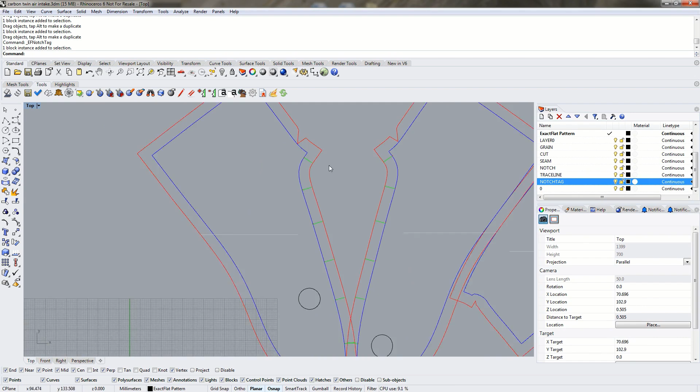And your trace lines, in this case the trace lines are here because we traced the cutouts onto the pattern piece, so we may want to assign a wheel blade or a drag blade to the trace line layer. For notch tags, we can probably do a pen tool or an airbrush as well. Or optionally, you can just simply turn those off, or if you want to bring them into another CAD package, you can simply delete those layers if they're not needed.

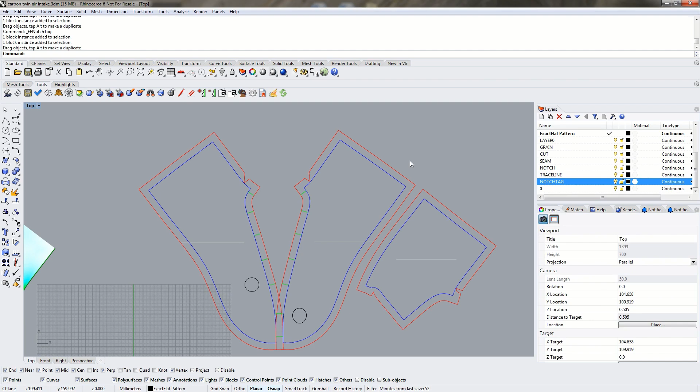So all the information that's created is very segmented and placed onto different layers. It's very easy to manage all this information in the DXF, remove the information that's not needed, and deal with the needed information appropriately.

So this has been a quick video on how to flatten this carbon intake. To summarize, we started with a surface. In this case, it was a step surface that we imported from another CAD package. I had resaved it as a 3DM before starting the video, but this was imported geometry from a step file.

We hid all of the information that wasn't needed, so we hid the air filters, the tie and the ratchet straps, we hid the set screws, and we separated the top surface from the thickness and the inside surface. Once we had our surfaces, we created a mesh, and we repaired any kind of meshing errors that needed to be repaired. We exploded and recombined our mesh into logical pattern pieces, so our 4 pieces here, top, bottom, right, and left.

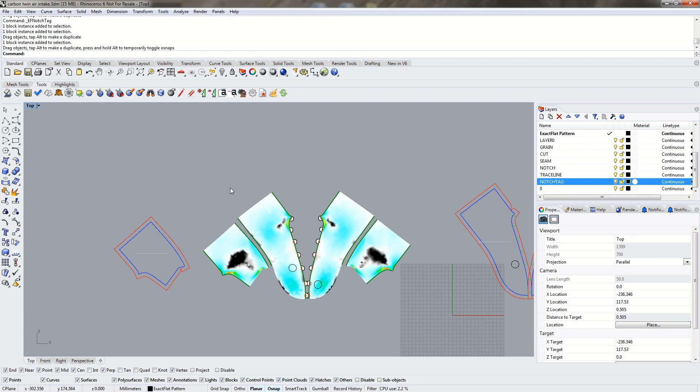And once we had our mesh, we used the Adaptive Remesher to create our remeshed version. So that's what the remeshed version looks like. We started off with this mesh here, and we used the Adaptive Remesher to create this. And this is the mesh that we used to flatten.

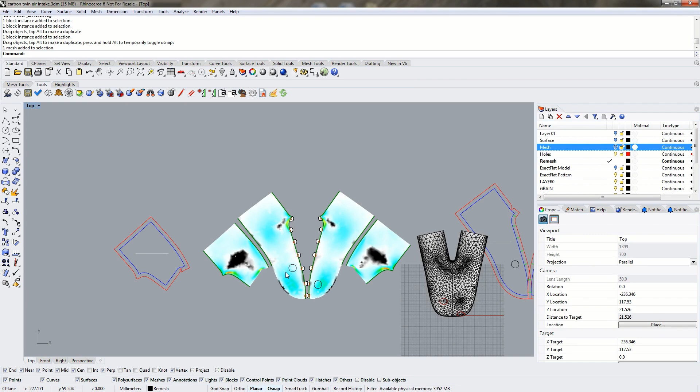So we also filled in the holes. That way we end up with a simpler pattern that optimizes quicker. So we flattened our adaptively remeshed mesh and used the pelt preflattener to remove all the flip triangles and a bit of the strain. Once we did that, we used the optimizer to get the final flat pattern shape. So thank you very much for watching.